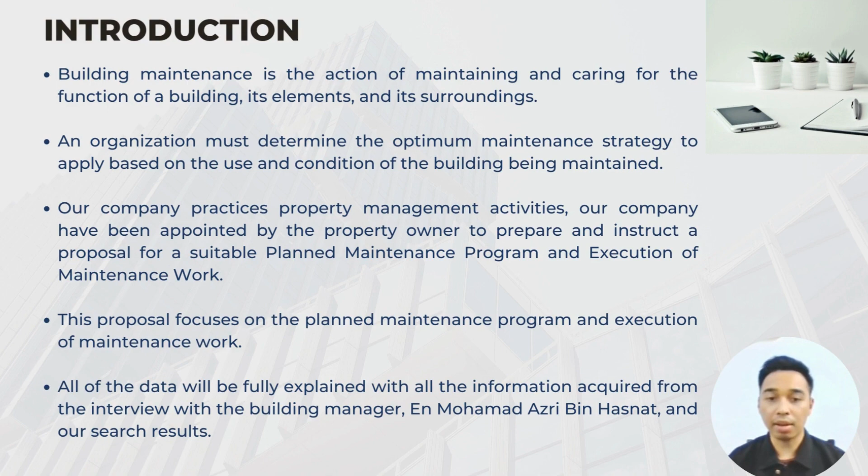The website is www.panoramapropertymanagement.com. Panorama Property Management is a management company that is good at managing the operation, control, maintenance, supervision, and oversight of physical property.

The organizational chart of this company consists of the Senior Manager of Property Management and Maintenance, Adib Hafizi, while the Manager for Services and Operation is Ezmira Farhanah, working together with the Senior Executive and Executives, Karina Natasya, and Rawaida.

Furthermore, the Property Manager for Project and Civil Engineering is Azreen Syamira, working alongside the Executive Property Administration, Syuib, along with a few of his assistants.

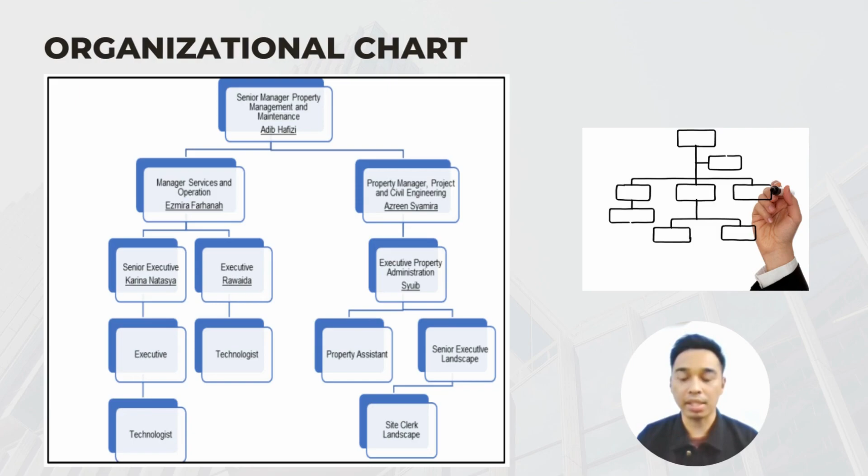Menara Hap Seng 1, originally known as MUI Plaza, is a 22-story commercial office building, including the ground floor, with 21 stories used for corporate use in KL's Golden Triangle.

As previously noted, MUI Plaza previously owned the Menara Hap Seng building, which was purchased and transferred to Hap Seng in 2004. Hap Seng 1 Tower is now entirely owned by Hap Seng Consolidated Berhad, along with numerous other subsidiaries, including Hap Seng Star, Malaysian Mosaic Sdn Berhad, and Hap Seng Building Materials Sdn Berhad.

This structure was constructed in the mid-1970s. It is a freehold holding and 45 years old. Previously, Menara Hap Seng underwent major renovations from 2008 to 2009, and as a result, it was named Best Office Development by FIABCI Malaysia Property Award, Office Development category, in 2009.

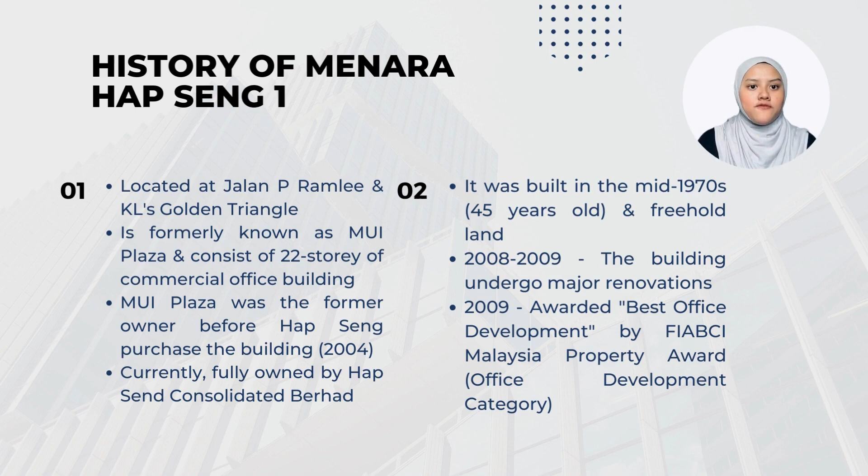This majestic structure is located on Jalan P Ramlee, not far from the country's icons of splendor, the KL Tower and the Petronas Twin Towers. Menara Hap Seng, as previously said, is a commercial office building of 22 levels including the ground floor, but only 21 of them are used for corporate and business purposes.

This structure has a car parking area in the basement. On level 1 and 2 and the ground floor, there are retail activities such as restaurants and outlets on the first and second floor, and offices on the 3rd to 21st floor.

Menara Hap Seng also has a podium, auditorium, and conference center with a maximum capacity of 300 people, 2 seminar rooms, and a VIP room with a capacity of up to 220 guests.

The exhibition gallery on the first floor, a roof garden open for hire appropriate for any type of event, a forecourt embellished with a water fountain and landscaping, and a free floor for alfresco dining and retail outlets are among the areas featured in Menara Hap Seng.

6 passenger elevators, 1 service lift, a new air conditioning system, enhanced fire safety alarms with smoke detectors and sprinklers, and a 24-hour security and surveillance system are also provided.

Menara Hap Seng is an ideal and user-friendly building since its utilities are conveniently accessible to the public and building tenants.

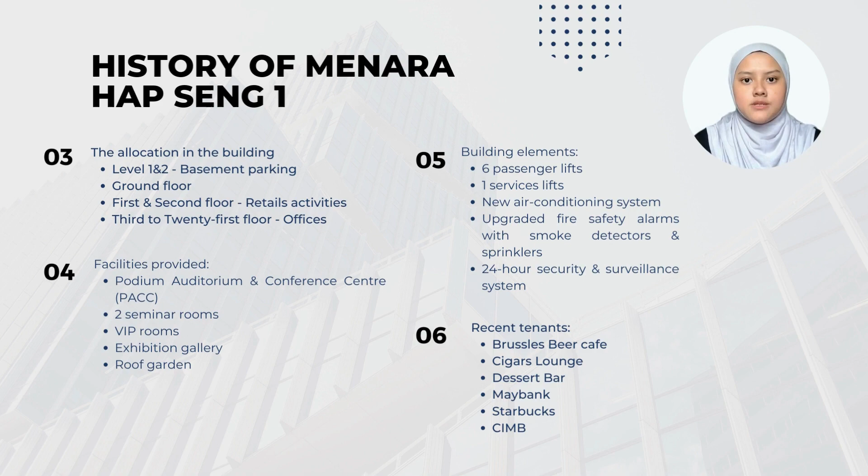Brussels Beer Cafe, Cigars Lounge, Dessert Bar, Maybank, Starbucks, CIMB, Florist, Specialist Golf Store, and many more are among the most recent tenants.

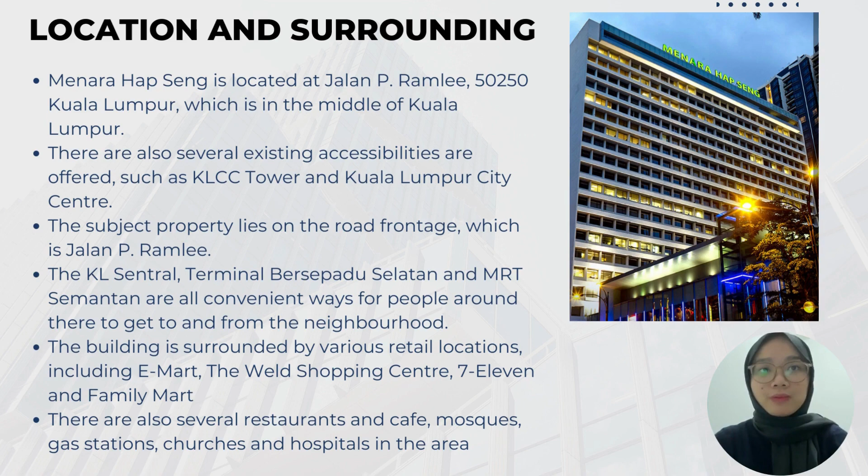Next, I will explain about the neighbourhood from the subject property.

Menara Hap Seng is located at a very strategic place as it has various types of development within a 5 km to 10 km area, which is mostly commercial, residential and recreational area. Starting with the commercial area, those close to Menara Hap Seng include Menara Prestige, Menara IMC and MBSB Bank business centre, KLCC Petronas Tower and Menara Kuala Lumpur.

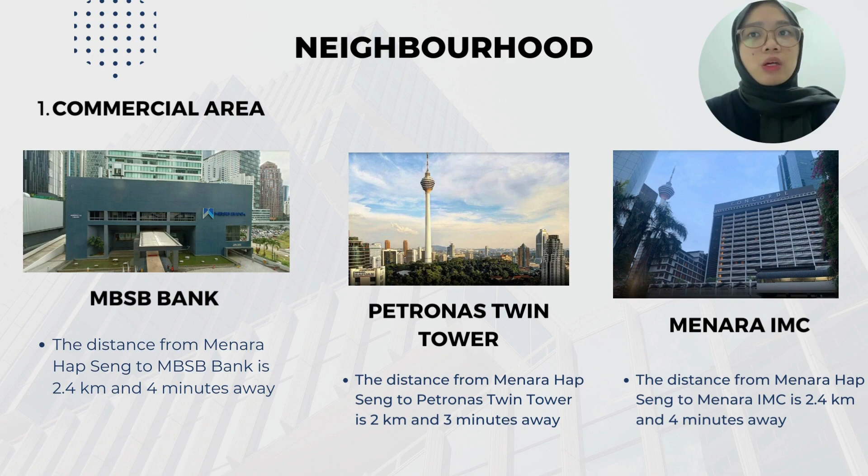In detail, the distance from Menara Hap Seng to Menara IMC and MBSB Bank is 2.4 km, about 4 minutes away. The location of Petronas Twin Towers from Menara Hap Seng is 2 km, about 3 minutes away.

Next is the residential area. Among the developments close to Menara Hap Seng, there are also residential areas provided in the middle of the city centre, namely Parkview Serviced Apartment, Crown Regency Serviced Suite and Vipod Residences.

In detail, the distance from Menara Hap Seng to Parkview Serviced Apartment is 3.1 km, about 5 minutes away, while the distance to Crown Regency Serviced Suite is 3.8 km, taking 7 minutes. Vipod Residences is located 4 km away, about 8 minutes.

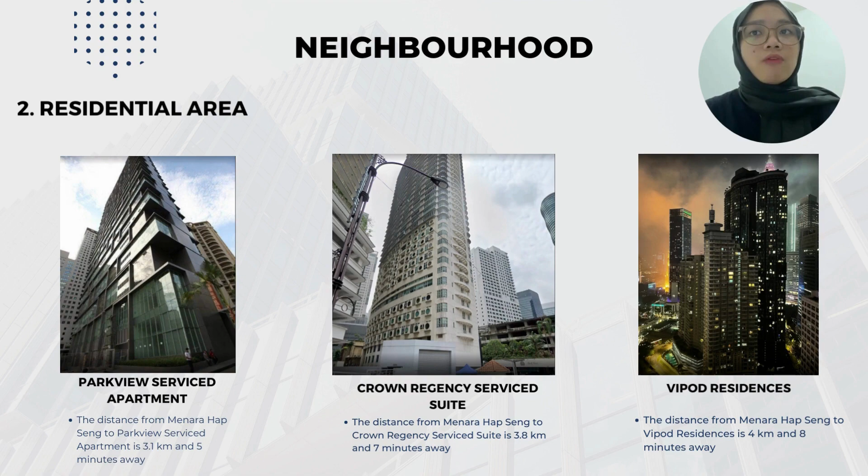Lastly, for the recreational area, within a 5 km radius there are recreational areas close to Menara Hap Seng, including KL Forest Eco Park and Taman Awam KLCC. The distance from Menara Hap Seng to KL Forest Eco Park is 3.5 km, about 5 minutes away, while the distance to Taman Awam KLCC is 2.5 km, about 4 minutes away. So that is all from me for now.

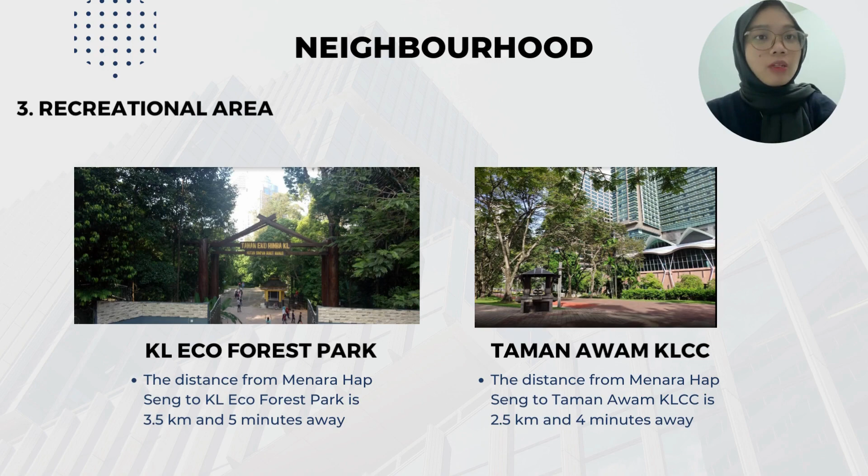Thank you. Assalamualaikum, my name is Nurul as Syamira, and now I will present about our proposed planned maintenance program. Firstly, we have decided to propose a preventive maintenance program for Menara Hap Seng 1.

In our opinion, this type of maintenance is the best for the subject property because the building is for mixed use of retail and office, which involves a large number of users consisting of tenants and visitors. If anything happens to the building that causes inconvenience or hazard to the users, it will involve many parties and affect the income generated. By using this type of maintenance, it may reduce the probability of building failure and sudden breakdowns.

Preventive maintenance is a maintenance program that is carried out at fixed intervals, for example daily, monthly, once in 3 years, and others. We divided our maintenance program into 3 terms, which are short-term, medium-term, and long-term.

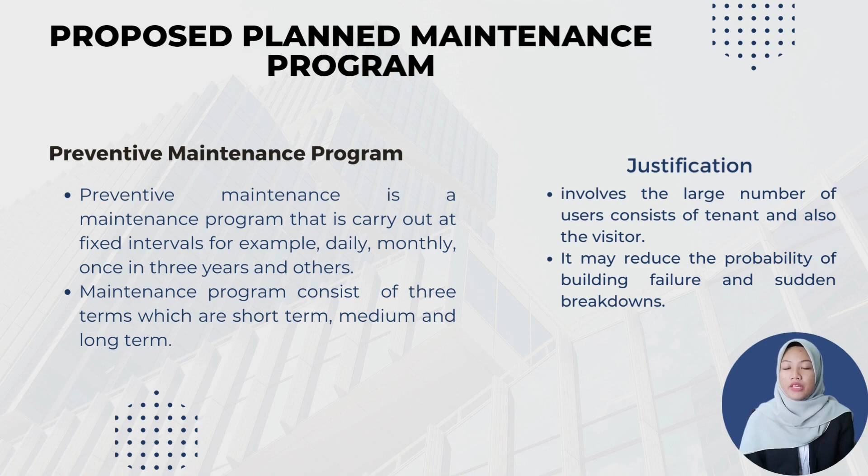So this is our short-term maintenance schedule. As you can see, the short-term maintenance schedule is usually executed daily, weekly, or monthly. All this maintenance activity needs to be done in short term to ensure that the building can operate daily and deliver its services. It also involves many regular inspections to ensure that any building failure symptom can be detected at an early stage before it worsens.

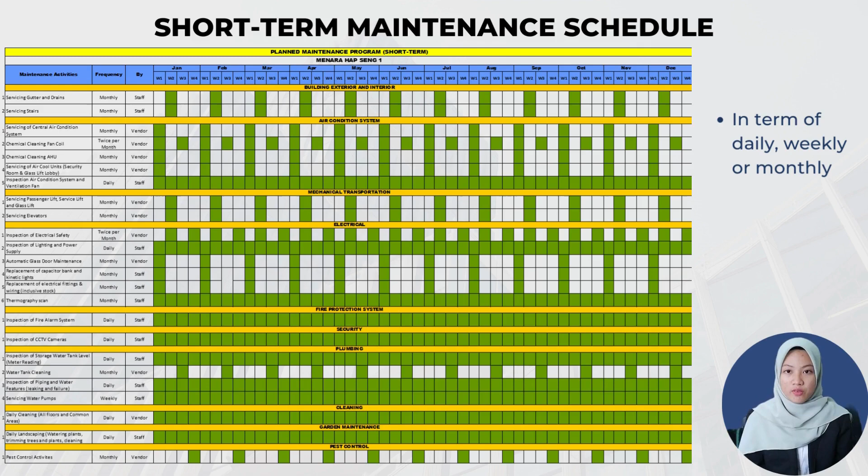Most of the maintenance activity is performed by the direct laborers, while the outsourced company carries out specialized maintenance work such as in mechanical, transportation, and air conditioning systems.

Next is our medium-term maintenance schedule. It involves maintenance activity that is executed on an annual basis. This usually needs to be done properly because it determines the allocation of annual budget for the subject property. As we can see in the schedule, the medium term is usually executed yearly, half-yearly, quarterly, and once in 2 months. Medium term also involves much more execution by the outsourced company and sometimes ad hoc maintenance activity. The maintenance activity proposed is based on the interview session with the building manager for the case study.

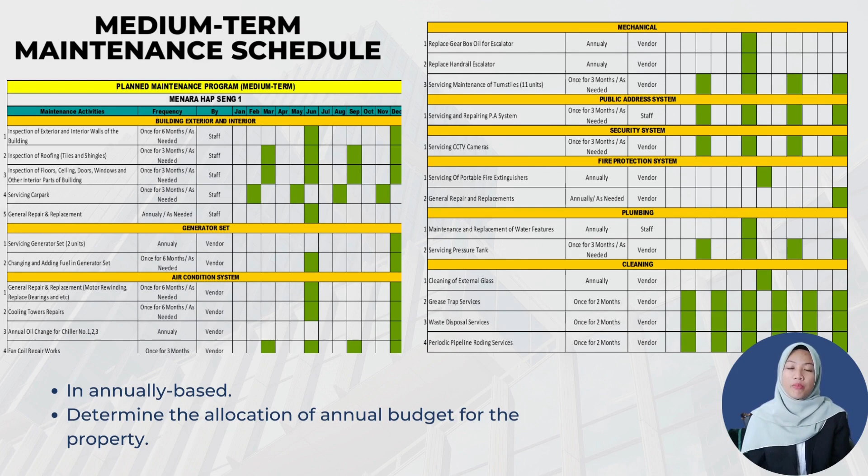Lastly, the long-term maintenance schedule. This usually involves maintenance planning for 3 to 5 years and is prepared with a goal to control the expenditure incurred for building maintenance.

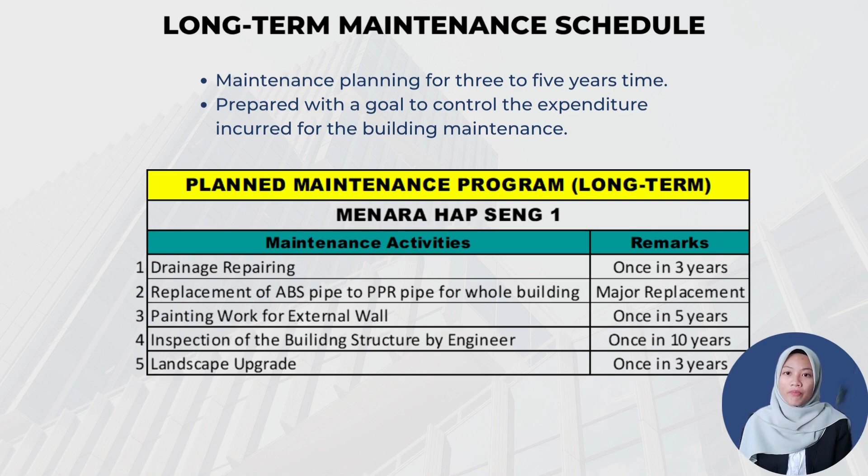For the subject property, it includes several maintenance activities needed for major repair and replacement of building parts. For example, drainage repairing needs to be done once every 3 years. The main consideration in planning the preventive maintenance program for the long term is the lifespan of the building and its building parts. So these are the proposed long-term maintenance activities for the subject property.

The execution of the maintenance work for this building is done by the internal staff, or we call it direct laborers, and also the outsourced company. Usually, the contract used for the outsourced company is a service contract for 1 to 2 years.

As for the execution workflow, we concluded that the aim and objectives of the client and the user are the significant thing when executing the maintenance activities. The execution of the maintenance activities must follow the maintenance schedule prepared in advance, just like the proposed maintenance program mentioned before. After all the needed maintenance activities are done and performed, monitoring the feedback, either positive or negative, is also important to make a better improvement in the future.

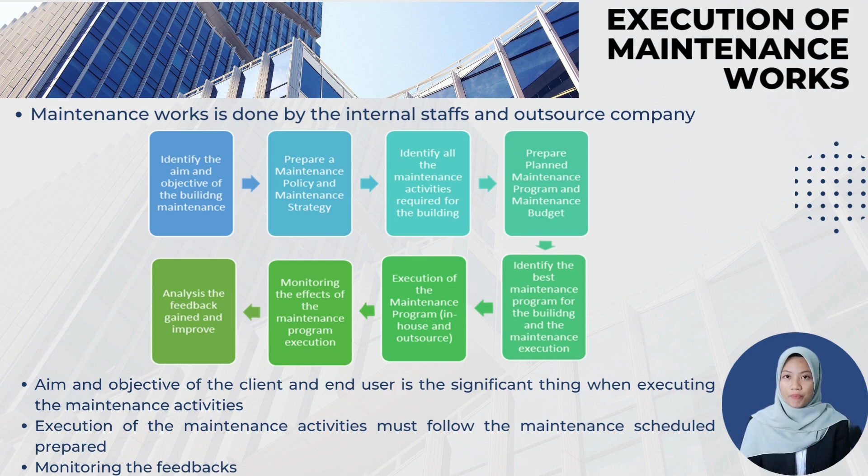So firstly, for the breakdown of proposed expenditure, the types of work for the maintenance of our building include civil, mechanical, and electrical maintenance. So all these different maintenance types are displayed in this table.

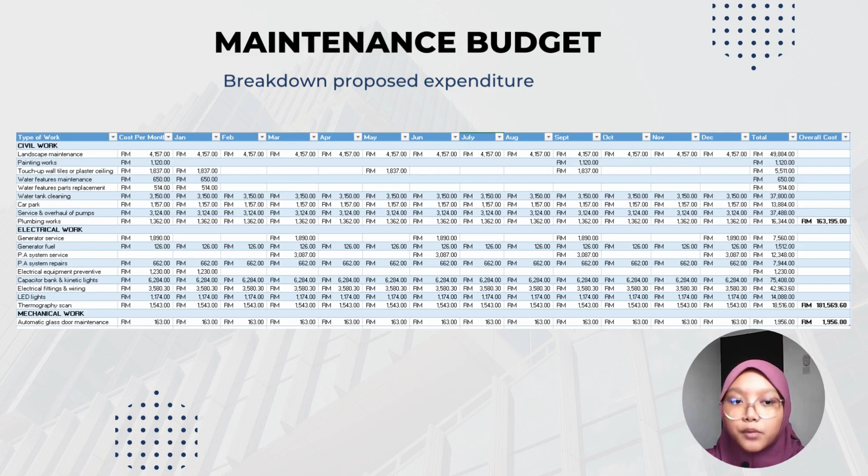Firstly, for the civil maintenance, it includes landscape maintenance, plumbing work, water treatment, and others. The total cost for civil work is 163,195.

Moreover, for the electrical maintenance works, it includes maintenance for generator service, electrical equipment preventive service, and PA system repair, among others. The total cost for electrical maintenance work is 181,569.

And lastly, for the mechanical maintenance works, mechanical work for our building includes automatic glass door maintenance, which costs 163 per month.

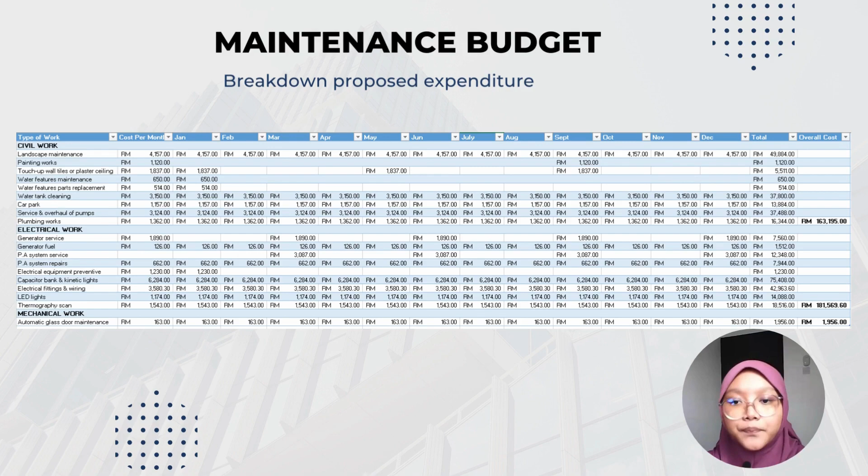Okay, next is for method of execution. Firstly is for direct labor. Direct labor cost consists of civil technician, facilities manager, mechanical technician, water technician, and also wireman.

Secondly is for contracted out or outsourced services, and it consists of air conditioner, passenger lift, service lift, glass lift, escalator, CCTV, turnstile, firefighting, electrical inspection, cleaning works, pest control and fogging, and also security. These outsourced services are very important to our building management, as it is the companies that help in managing the building in a more expert way.

The highest outsourced cost is on cleaning works because it is required every day and automatically it spends more money. Therefore, the total amount of contracted out or outsourced cost is

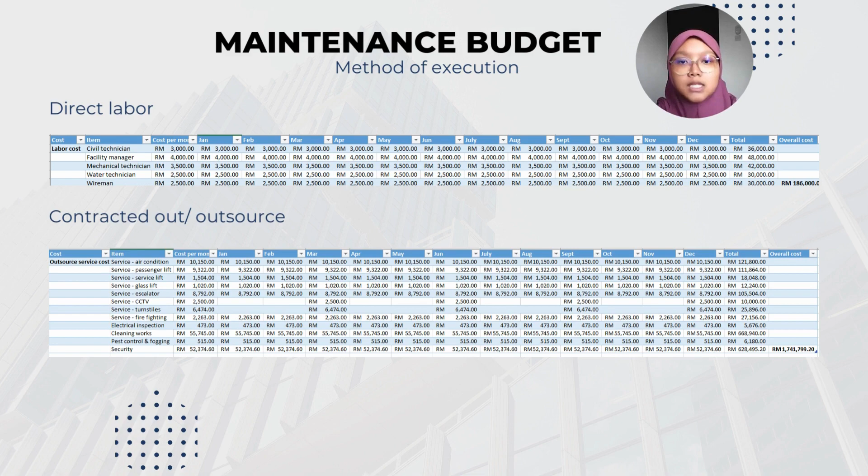1,741,799. Next is for timing of proposed work. The contract period for proposed work is 4 years, and it is estimated that the contract value is 13,000,000, meanwhile the contract value per month is

270,833. As can be seen from the table above, Menara Hap Seng has mentioned a few expenditures for maintaining the building. The main costs such as labor costs, tools, instrument costs, maintenance costs for outsourcing services, petty cash, breakdown maintenance costs, and others. So in order to save costs, management evaluates the difference in price between the gross budget and

the actual budget for the products. The money saved will be utilized to cover future expenses. Based on the table, the total saving cost for labor cost is

7,000, and the total saving cost for tools and instrument cost is 4,380. Meanwhile, the saving cost for maintenance cost for outsourced service is 353,200.

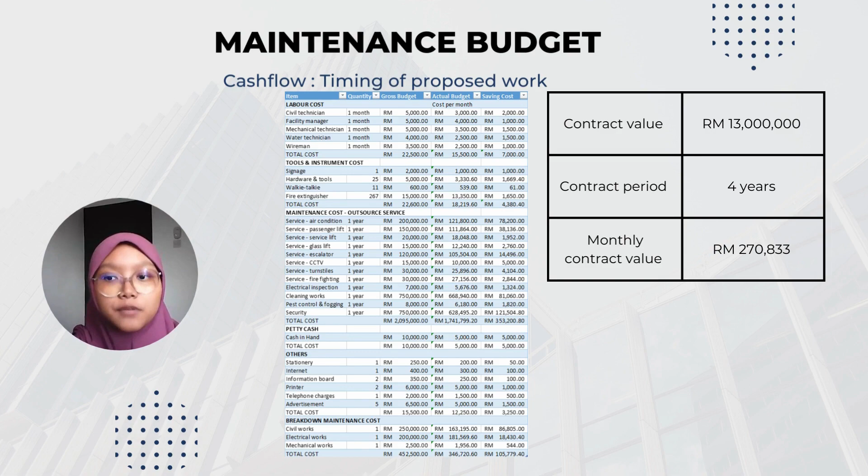Other than that, the total saving cost for petty cash is 5,000, while the total saving cost for breakdown maintenance cost and others is 105,779 and 3,250. So this is the cash flow pattern over the budget period, which is from 2022 to 2025.

It is shown for 4 years, and it is stated that the starting cost for tools and equipment only is 18,219, while all the maintenance operation cost for 2022 to 2025 overall is

8,485,079. It also showed that project cost for all period is 820,000, and it stated that the contract value for 4 years in the summary budget table is 13 million, meanwhile the gross maintenance cost is

9,323,298. Therefore, the gross profit that Menara Hap Seng will gain is 3,676,701 ringgit. This implies that Menara Hap Seng's management will save a significant sum of money, and that the maintenance schedule is

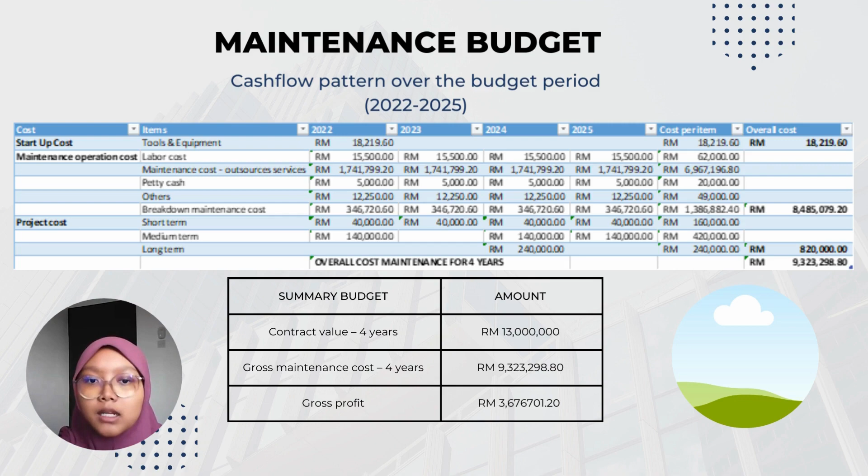properly thought out for the future. Effective maintenance services may achieve the company goals and prepare it to deal with any risk and hardship that may arise in the future.

This table shows the salary paid by our company to all positions at Menara Hap Seng for the direct labor force salary and also their allowance. It shows that the basic salary for all positions is from 3,500 to 2,000, and the allowance for all positions is from 200 to 500.

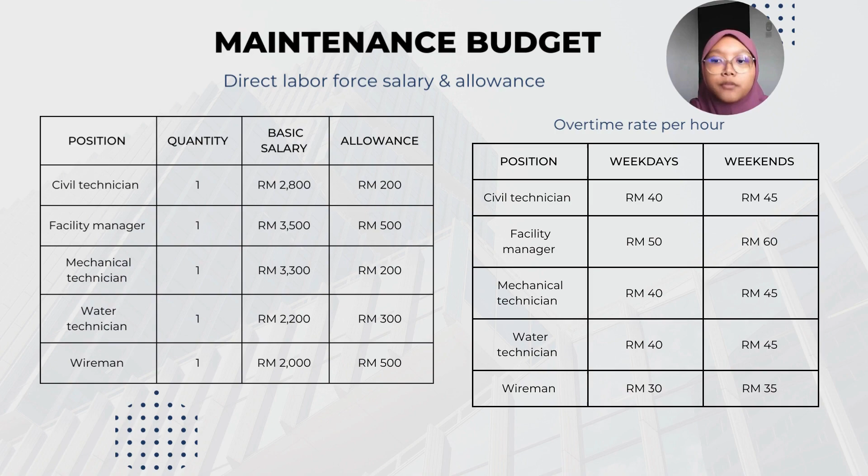The other table is the overtime rate per hour for each position, and based on this table, the rate for weekdays is from 30 ringgit to 50 ringgit, and the rate for weekends is from 35 ringgit to 60 ringgit.

Okay, next is solutions for maintenance strategies implemented. The planned maintenance program used in Menara Hap Seng varies according to the scope, which has been distributed according to the detailed characteristics. Although there are various programs that have been implemented, there are also defects or minor mistakes that can lead to major destruction of a property.

Therefore, there are several solutions that can be implemented to control the defects and mistakes that occur in the maintenance work. Firstly is to maintain a list of facility assets and equipment related to maintenance work.

The list of facilities and equipment assets such as the number of lifts, the number of water pumps, electrical appliances, equipment such as bulbs and so on should be carefully and efficiently managed in terms of their condition and functionality, because they are assets that provide convenience to the majority of users in a building.

Functional failure of the asset can have a large impact on user discomfort and can result in major repairs which will involve very large costs and may cause losses to the management. Thus, with this solution, it allows the management to be more careful and accurate about the amount and duration of the asset's functionality.

Furthermore, they can schedule maintenance according to asset priority if the list is made carefully and in detail about the period of time an asset can be functional.

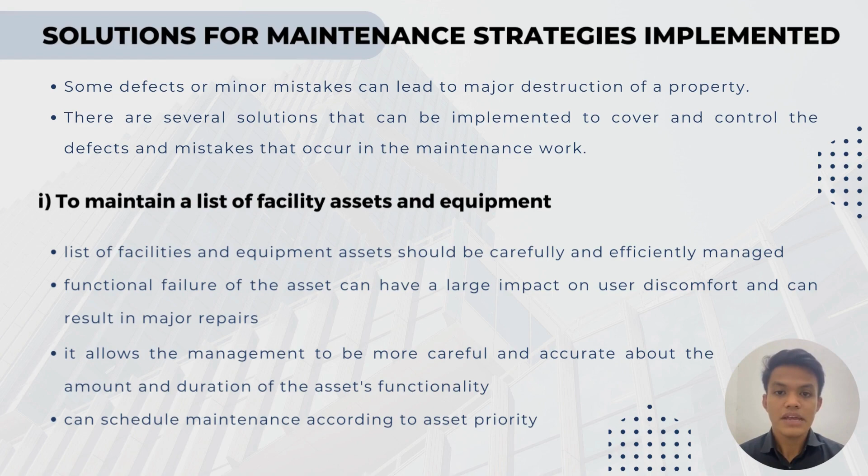Secondly is to identify and deal with the risk areas within the property. Areas at risk can be defined as internal areas that store flammable and hazardous facility assets and sensitive or perishable components. Management must identify areas with current and potential risks by reviewing failures that have occurred or may occur and immediately make actions to the maintenance plan program implemented.

By optimizing maintenance in this way, the management is able to minimize the risk found in some areas in the property easily. In order to use this method of solution, maintenance needs to prepare a task schedule for the routine inspection of the areas at risk in various ways, such as using computerized maintenance management system software to be more efficient and accurate.

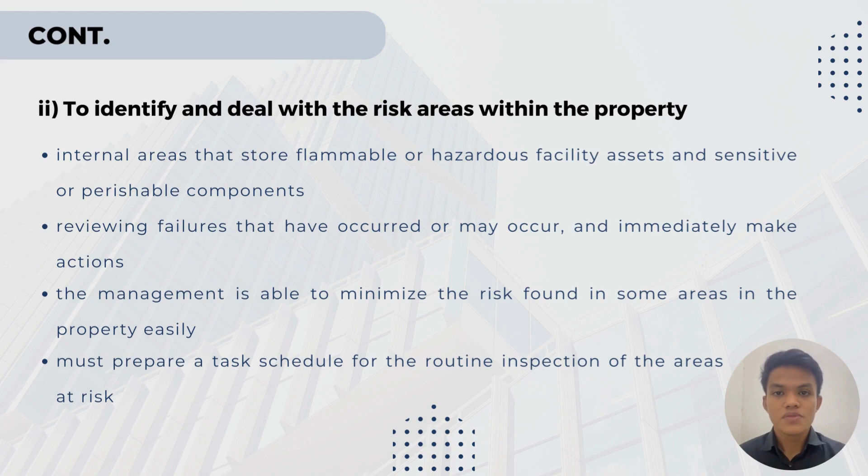Last but not least is to provide staff training programs. This program is very important to all staff involved in maintenance work to ensure that each task can be carried out well. This is because maintenance work in a large building such as Menara Hap Seng, which has complex components and assets, requires a high level of skill by each staff member in doing the work.

All the maintenance strategies that are implemented are greatly influenced by the skills in doing specific tasks, because if the skills of the staff doing the work are very low, it will cause defects in the maintenance strategy and at the same time result in a decrease in the value of the building itself, as well as a deterioration of its functionality. Therefore, every staff member needs to get skill training to strengthen their knowledge and efficient techniques in carrying out maintenance work in a building.

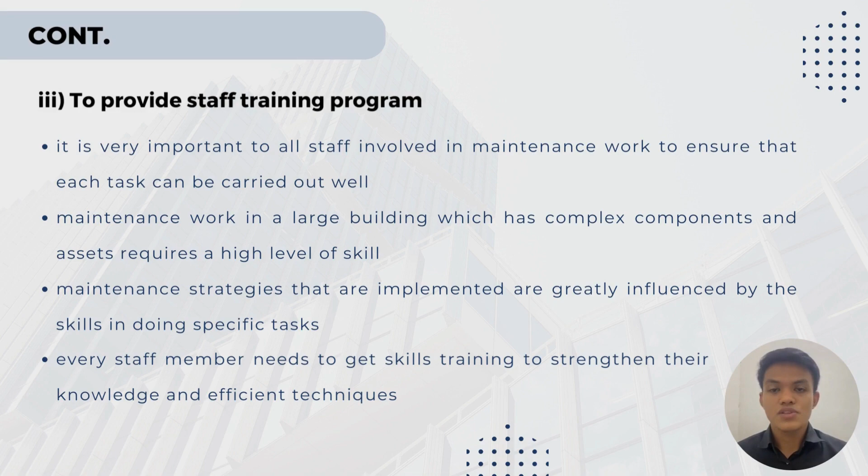Next is recommendations in maintaining the optimum condition of the building. There are several suggestions that can be put forward to strengthen the maintenance strategy in maintaining and restoring the condition of the building to an optimal level.

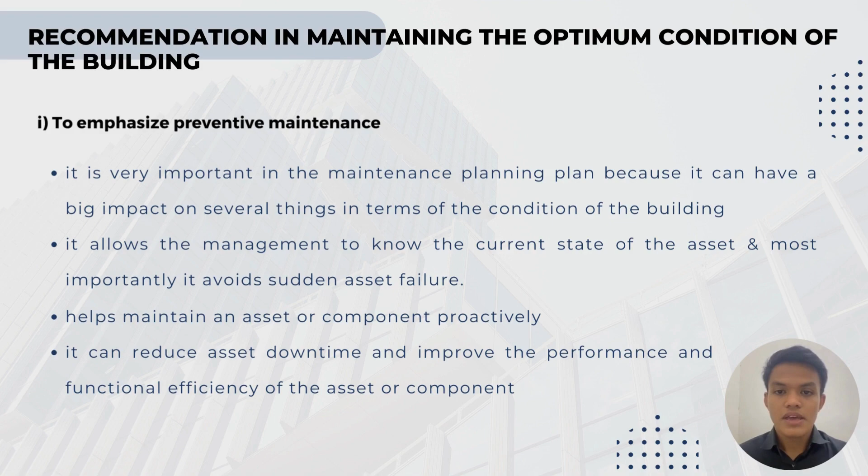At the same time, it is able to preserve and restore the condition of the building to an optimal level, and also can reduce the cost of expenses in the event of a major repair to any damage.

Apart from the previous recommendation, an organization needs to adapt the way of working with today's technology by moving to an automated system in the work of data storage or maintenance records that have been implemented, are being implemented, or will be implemented. For a large building like Menara Hap Seng, there are many records or data related to maintenance that need to be kept well because it is very important to be used in the future.

Conventional data storage and recording methods, such as manual or written records storing data in a file room, need to be phased out and need to move to an automated system. The use of these systems is more efficient in various aspects of maintenance work, such as recording financial systems or budgets, recording components in a building, and so on. It is able to provide high accuracy and reduce errors that may occur when using manual methods.

In the event of damage that can lead to a decrease in the value of the building, the data required to restore the damage is easily accessible, so that maintenance work can be immediately launched to ensure that the condition of the building and its functionality are at an optimal level.